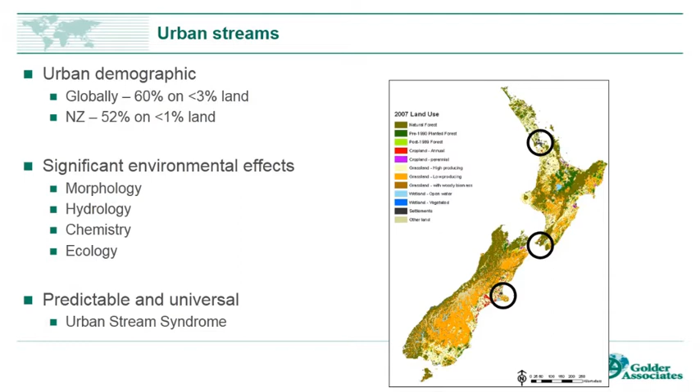So, urban streams. Globally, there's a pretty significant shift in the demographics of human populations. Urban dwellers, city dwellers are increasing at a phenomenal rate, such that we've got currently 60% of the global population living on 3% of the land. And in New Zealand, that situation is probably a little bit more extreme, where we have over 50% of our population living on less than 1% of the land.

Now, this land use map on the right-hand side, you can see if somebody didn't know New Zealand, they'd struggle to find the urban centres. So those 3 circles represent the main 3 urban centres where over half of the population of New Zealand live. Now, the pressures created by this intensity of people and their resource demands lead to significant environmental effects across a whole range of environmental domains.

In stream systems, these have been particularly well described, and they include effects on morphology of streams, hydrology, water chemistry, and ecology. Now, these effects are predictable and widespread. They've been recorded from virtually every urbanised centre across the globe, and they've led to the description of a syndrome called the urban stream syndrome. And here's some evidence that it's alive and well in New Zealand. This is some data from Auckland Council's monitoring programs.

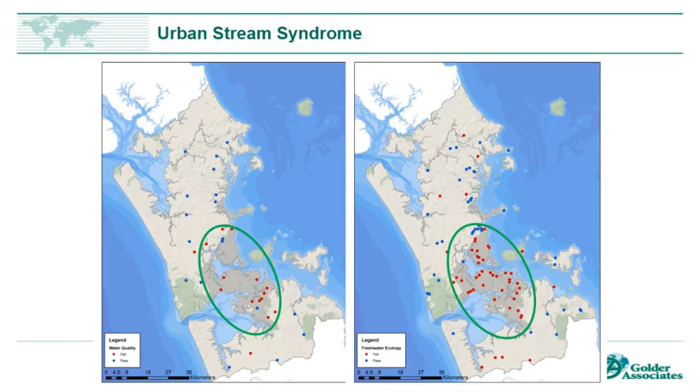On the left-hand side, we have a map showing water quality locations, and on the right-hand side, we have a map showing ecological monitoring locations based on invertebrate communities. And we see on the left-hand side, hopefully I'm not blocking you, the red dots correspond to those water quality monitoring sites that fail one or more of the NOF bottom lines. And you can see there's a preponderance of red dots in and around the urban area.

And on the right-hand side, this is the invertebrate monitoring, the ecological monitoring. There's more sites in this monitoring network, hence we've got more red dots. But essentially those red dots represent sites that have an MCI value of less than 80. So in terms of the national guidelines for reporting MCI values, they're considered to be in poor ecological condition.

Now, the data is presented on the next slide in a slightly different way. It's the same underlying data, but it's just represented in a graphical format. And the take-home message from this one really is just to show the extent of degradation in urban streams is typically far greater than the other types of land uses we subject our streams to. We see a pretty consistent and predictable gradient of decline from our reference sites on the left-hand side of the chart through to our urban sites on the right-hand side of the chart.

So this is quite a common occurrence. For example, in Baltimore in the US, 66% of their streams were buried. Within the last year, I've also been involved with a structure plan that proposes to pipe and divert 10.5 kilometres of stream. So I'd like to say this is a legacy issue, but it's ongoing and it's happening.

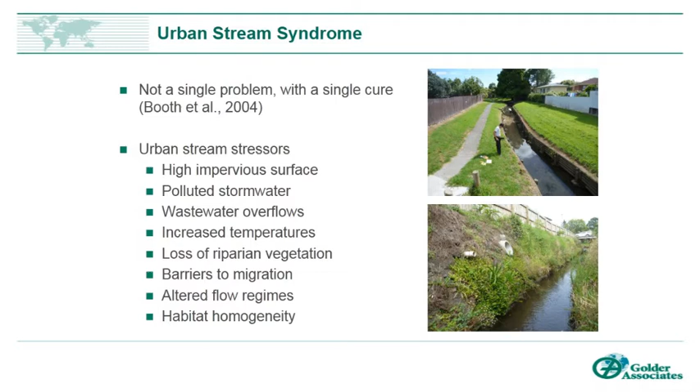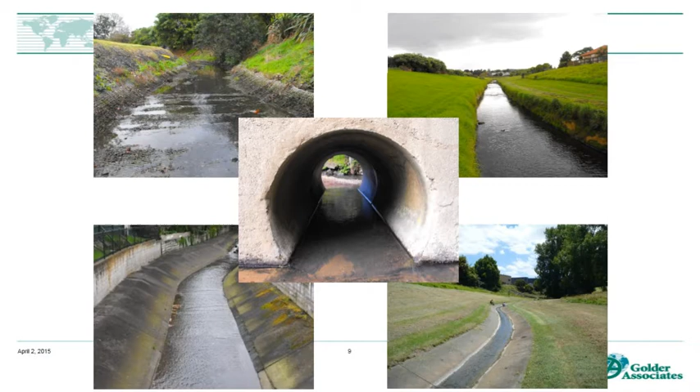And the next slide is really just to demonstrate that point. This is a collection of New Zealand's finest urban streams. And what we're really showing here is that just from looking at these images, logically you can see there's different stresses acting here in different locations. And then we need to be cognizant of this when we develop our management approaches.

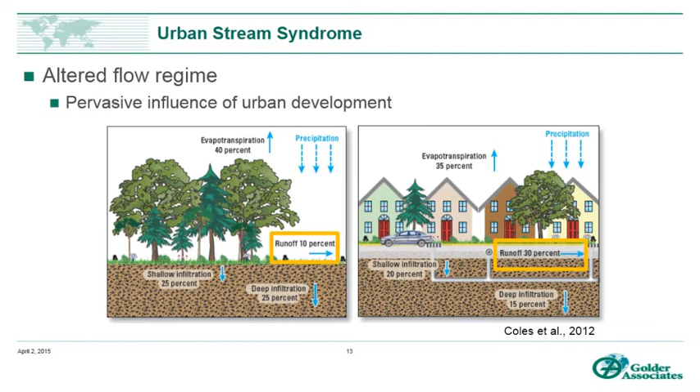In an urbanised system, so this is a moderately urbanised system as well, for extremes it gets even higher, but 30% of the rain immediately runs off those impervious surfaces. So there's obviously a threefold increase in runoff. And the other thing to note on here is the reduction in infiltration into the groundwater, which contributes to stream base flows recharge. So the combination of those two things is that you end up with modified hydrographs.

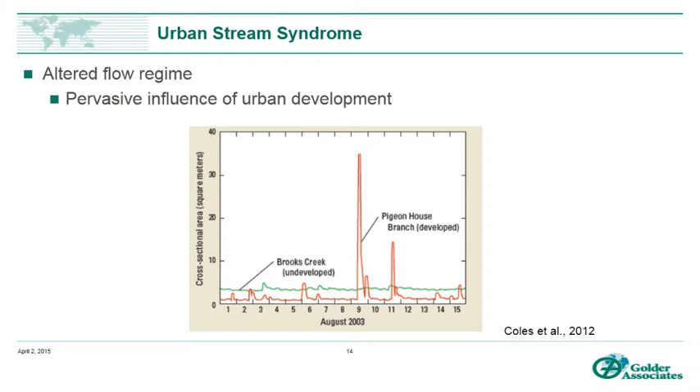Now this one here, again, is another one from the USGS, and the two lines there represent two different streams that are very close together, similar geology, similar climate, but the main difference is one's urbanised and one's not. And there's two points here really to look at, and one is the red line and how high it goes following storm events in comparison with the green line.

And following even moderate rain events, the discharge in that stream can be 5 to 6 times higher than in the undeveloped stream. And then the other side of the equation is you look on the green line, the base flow between storm events is higher in the undeveloped catchment. So with urbanisation, we get a double whammy on hydrology. We get much higher flows after storm events, so there's much more disturbance, and then in between events, we get less water, and those streams are more likely to become intermittent or have low flows in them.

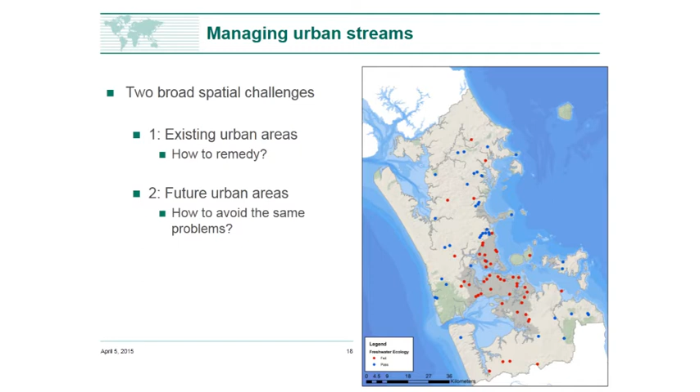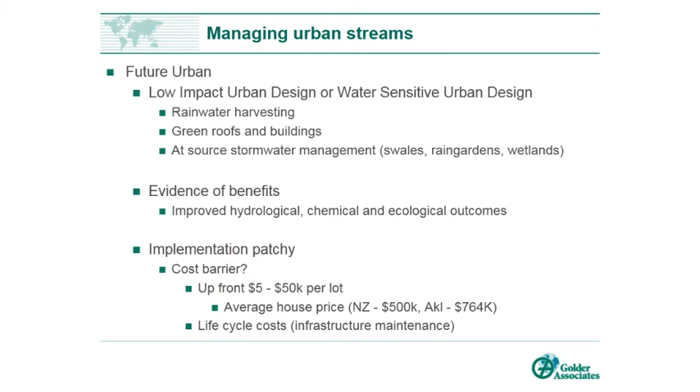Depending on what hemisphere you're in, low impact design in the northern hemisphere or water sensitive design in the southern hemisphere, it's the same basic thing. It's essentially an approach to development where you're managing fresh water in a more holistic way, and you're including things like rainwater harvesting in your developments. You're including methods to increase infiltration of rainwater into the ground, and also at-source stormwater management, which also aligns with what Richard was saying about mitigation options being more effective when they're near their source. So this is the general philosophy to this approach.

And there's mounting evidence around the benefits of low impact design or water sensitive urban design. There's studies from across the globe now, including in New Zealand, where we're seeing improved outcomes associated with using low impact design techniques, including hydrological, water chemistry, and also ecology. So it is a solution that can be used to fix some of the future urban issues. The main issue, there seems to be an implementation barrier associated with the cost.

Now, this is still an area that is subject to a huge amount of debate, quite controversial and quite heated debate, about where the costs lie for LID or conventional stormwater management. In the current environment, I'm sure you're all aware of the drive for affordable housing in Auckland, so anything that adds money to the cost of a lot or a house in Auckland is not particularly palatable in a political sense. But the cost of these low impact designs has been estimated between $5,000 and $50,000 per lot, depending on which camp you're in, so there's still a lot of uncertainty that needs to be addressed here.

Depending on where that estimate falls, that could be quite a small proportion of the average house cost, or it might be quite large. But even greater in the cost debate is what are the life cycle costs? Quite often we focus on the upfront costs of doing LID, but if we don't do LID, what are the life cycle costs of the conventional stormwater infrastructure and maintenance we have to manage to deal with those ongoing problems from stormwater management?

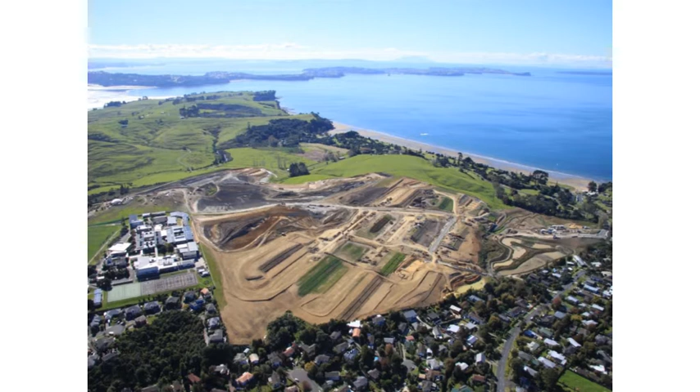Existing urban - how do we go about managing existing urban? I sometimes get accused of being a bit negative, but nowhere in the world have we successfully restored an urban stream once it's been degraded. It's a pretty hard-hitting statement, as the guys reminded me this morning when we did a run-through. Essentially, there are areas of urban streams that have been cleaned up and made a little bit better, particularly associated with the management of point source discharges, and the River Thames and the River Rhine are two examples that are quite often used. But fully restoring a system with a functioning ecosystem is still beyond our grasp.

However, I see this as a problem that we can turn into an opportunity. Most of the urban restoration projects that I've seen have quite obvious failings or issues associated with that failure, and it can be used to explore them. Two of the biggest ones I've mentioned here are intervention logic and scale issues. I'm just going to illustrate these two with a couple of case studies. Before I mention these case studies, these are not a criticism of those case studies - they're really just showing you the process that we need to go through when we're managing urban streams and existing urban areas. Both of these case studies have won Environmental Steward Awards.

Both of them have achieved probably significant social amenity outcomes, but one of the things they haven't done is achieved meaningful freshwater outcomes. The first one is Project Twin Streams. If we're solving a problem, and I think Richard mentioned it as well, we need to diagnose what the problem is, what's the cause of the problem, and then target our management accordingly.

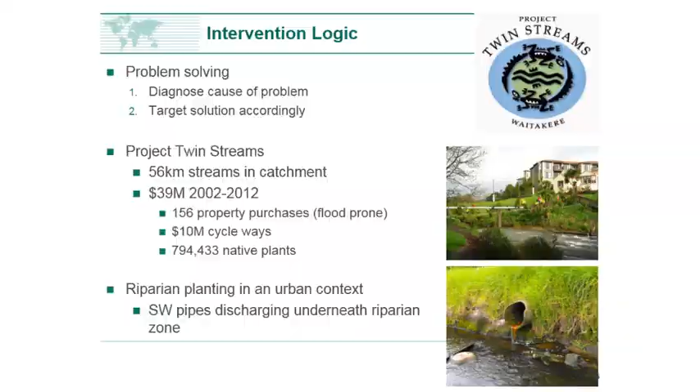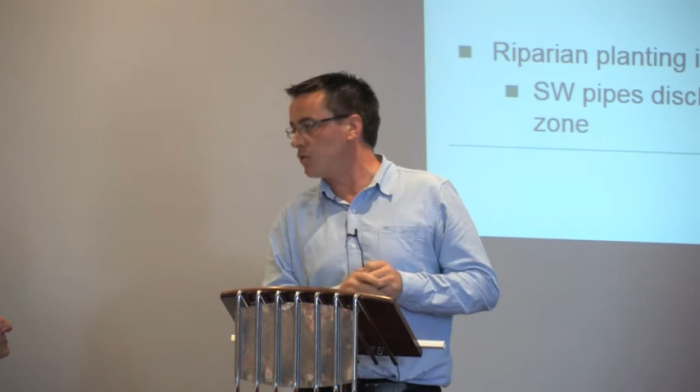That's not really happened in Project Twin Streams. It's secured a huge amount of funding, most of which has been used for procurement of flood-prone properties and also the creation of cycleways. But there have also been nearly 800,000 native plants planted in the catchment, which is no mean feat and is obviously likely to lead to a whole series of terrestrial biodiversity benefits. But one of the big problems here is we're using riparian planting in an urban context. This is a management tool that's been successfully used in rural systems that we've just picked up and applied in an urban system.

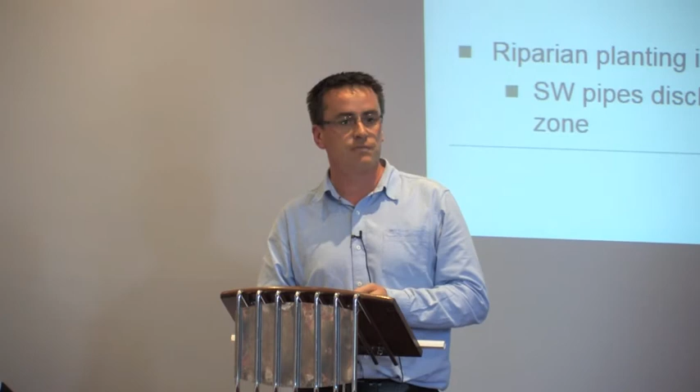The image down the bottom here shows what the problem is - most of the stormwater management issues in an urban catchment are piped directly into the stream. So there's no opportunity for riparian planting to really filter or work its magic on the overland runoff. The point here is that we need to be thinking about what's the problem and addressing that problem with a targeted solution rather than just taking these one-size-fits-all management opportunities in various places.

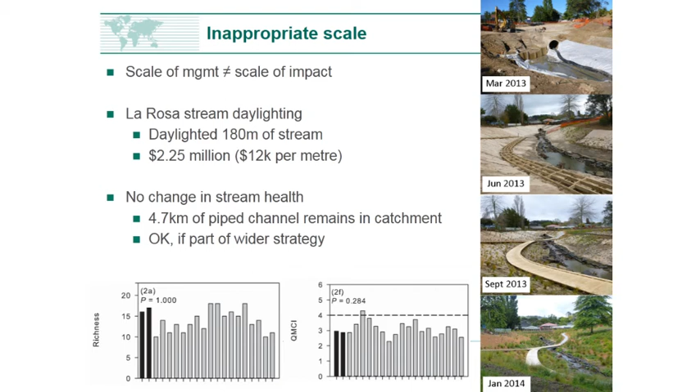The next one is a daylighting project that happened in urban Auckland. This really demonstrates where the scale of the management response is outweighed by the scale of the impact. There's a time series down the right-hand side which shows the nature of the project. This was another project, pretty expensive, over $2 million - that equates to about $12,000 per metre of stream restored. So if you imagine trying to do that on a large scale, it's pretty significant investment. What we've seen is that we've got quite excited about daylighting 180 metres of stream, which is fine - it has some positive aspects to it.

But the real issue from a freshwater perspective is that there remains 4.7 kilometres of piped stream upstream of that location in the catchment. So we're really just picking at the edges. But that would be fine if it was part of a strategy, potentially the first step of many to restore that catchment, or if it was deliberately done to raise the social profile of urban stream restoration.

But this project, one of the objectives was to improve water quality outcomes. The two plots at the bottom show some of the ecological monitoring we've done. We've sampled invertebrate communities every month since the stream was daylighted. The dark bars represent what was living in the pipe before it was daylighted, and the grey bars represent samples taken since daylighting. I don't need to do a statistical test to say there's not really a lot happening there.

Cool, thanks Clive. I think I'm nearly done.

So rather than be negative, I really wanted to say what could be done. This is probably the closest thing in the world that I'm aware of to a successful urban stream restoration project. It's in Melbourne - the Little Stringybark Creek, which is an interesting name in its own right. It's a catchment that's been undergoing restorative actions over the last 10 or so years.

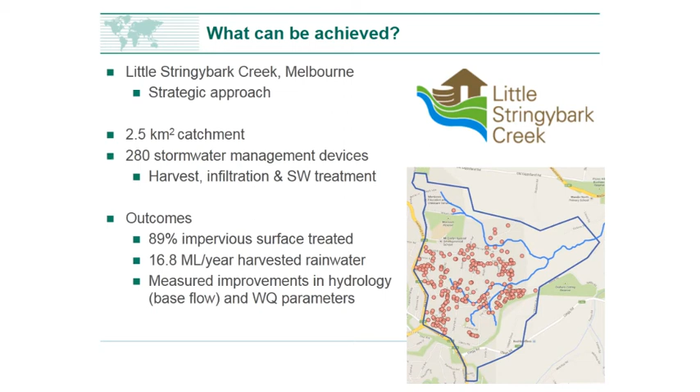It's a multi-organisational project. The water providers are involved, the universities are involved, the local councils are involved. Most of the work is done through mobilisation of social groups, so it's still got some consistencies with the projects we've used in Auckland.

But it's quite a small catchment, so they deliberately targeted a catchment that was small enough where they could make a difference. They deliberately targeted a catchment where some of you may be familiar with the impervious cover model where you get a response. They deliberately targeted a catchment that was near the threshold of change, so it was easier to move it back and get a response.

So this is a 2.5 square kilometre catchment, so it's not very big, and they've introduced 280 different stormwater management devices in that system, with the intention of increasing the harvest of rainwater, the infiltration of rainwater, and also the treatment of stormwater quality and quantity.

The outcomes associated with this project - we've now got 89% of the impervious surface in that catchment captured and treated by these stormwater management devices. There's nearly 17 million litres of rainwater that is harvested every year and reused for domestic purposes. And we've started...

They've observed measurements in increased base flow, so hydrological response in the catchment. They've observed responses in water quality, water chemistry measures. They're yet to see a response in ecological measures, but if you were thinking about how a stream might respond, the ecological responses would naturally become later down the track.

So it's not all doom and gloom. These guys have done it. They've been tactical about where they've done it, tactical about how they've done it, and they've managed to pull off a pretty successful project thus far.

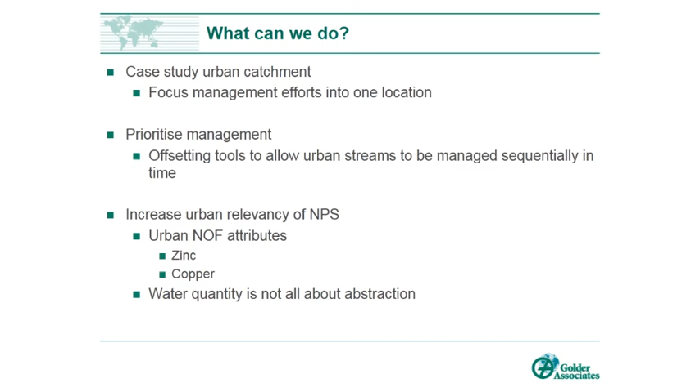The second point is I think we need some sort of mechanism to prioritise our management of urban streams. Quite clearly we can see from Stringybark that there's the level of investment required - we can't do it everywhere at the same time. So we need a robust mechanism to allow us to sequentially deal with some of the urban issues going forward, presuming of course we can.

And then there's also some opportunities to include some more urban relevancy to the national policy statement. First and foremost, this could involve some urban-focused NOF attributes, and obviously copper and zinc are the two ones I've shown you from Auckland, notwithstanding the issues around monitoring or managing the sources of those because they're at an international scale. And the last one is really a recognition that water quantity is not all about abstraction. Hopefully the hydrological issues here that I've highlighted demonstrate that it's not about how much water you take out of urban streams, it's about how much we put in.